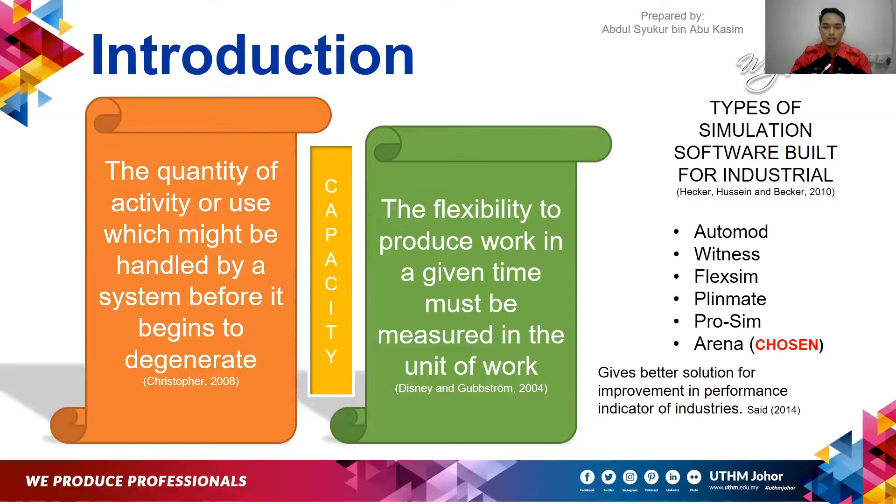There are many types of simulation software built for industry such as Automod, Witness, FlexSim, ProModel, ProSim, and also Arena simulation software. But for this study, the Arena simulation software has been chosen because it gives better solution for improvement in performance indicator of industries.

For the problem statement, small and medium enterprises contribute significantly to the country's growth. The food industry must enhance its production system performance and capacity utilization to increase production output. The daily output rate for Fast Kitchen Sdn Bhd Parit Raja is inconsistent and hard to achieve their target. The lack of standard production rate as the main indicator in the management may lead to the problem.

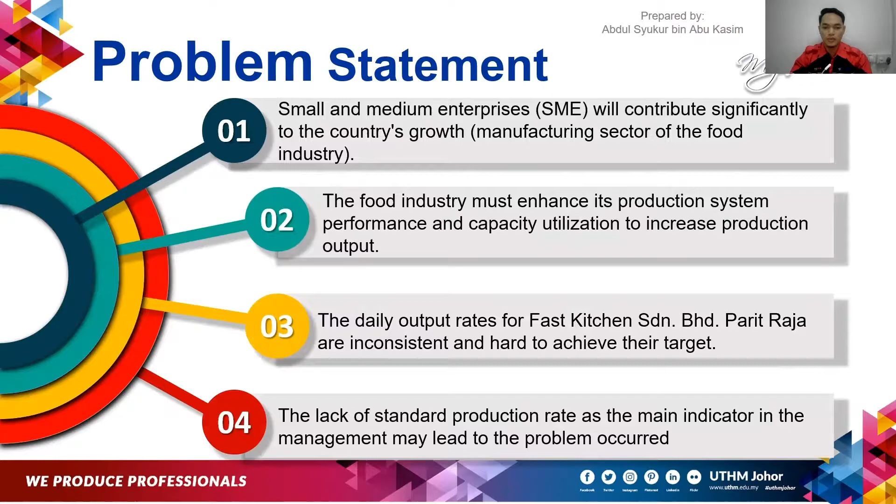There are two objectives in this study, which is to build and simulate the Arena simulation model for the production process of a food processing company. The second one is to analyze the capacity of the food production process using Arena simulation software.

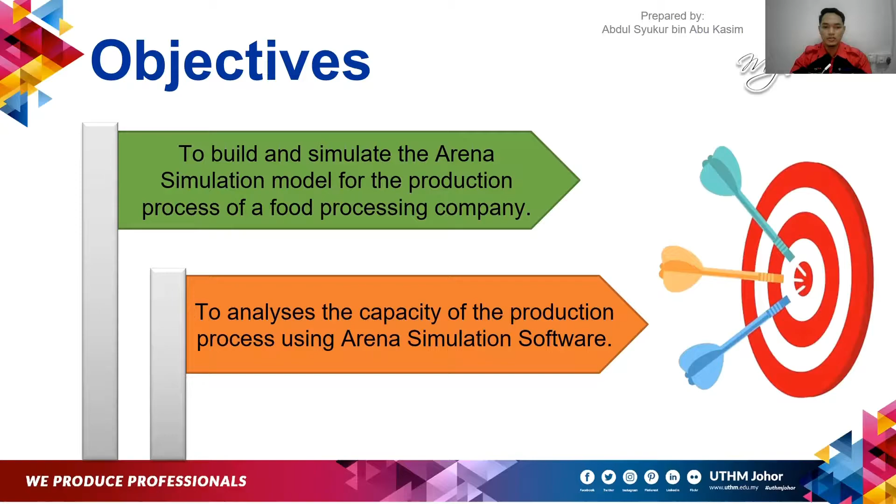In order to achieve the objective of this study, the scope of the study was the production process based in a small food processing company in Parit Raja, Fast Kitchen Sdn Bhd. The operation of the process is simulated using Arena simulation software, and the last one is the project study covered capacity production such as the company layout, manpower, time taken, and also production output.

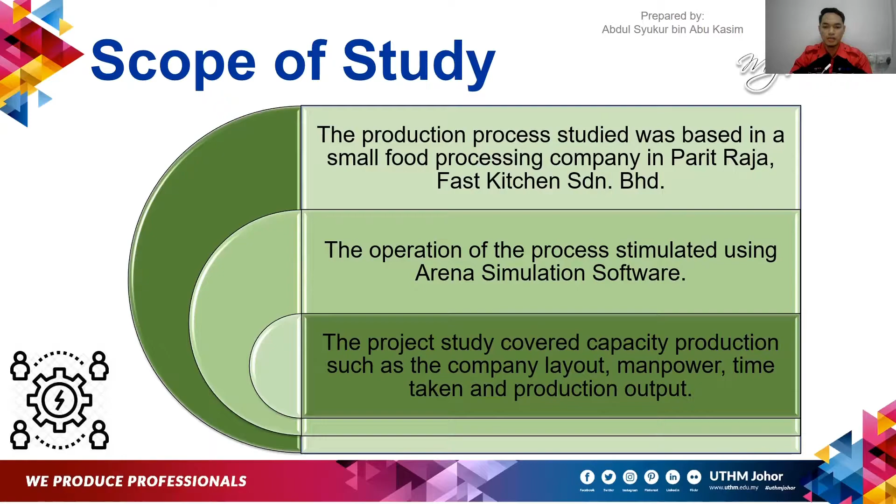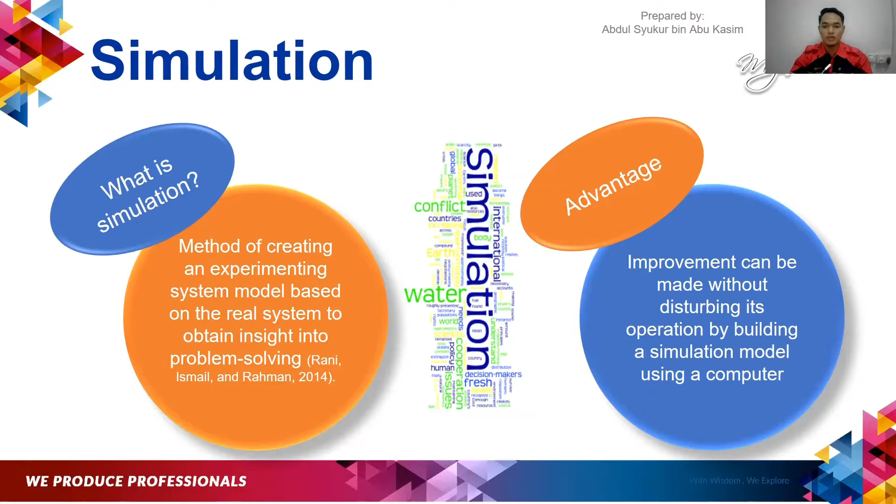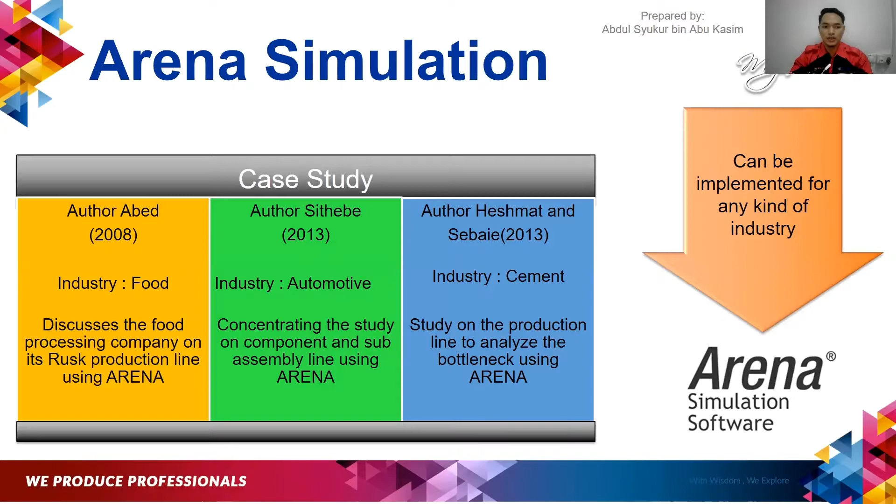What is simulation? Simulation is a method of creating and experimenting with a system model based on the real system to obtain insight into problem solving. The advantage of the simulation software is improvements can be made without disturbing its operation by building a simulation model using a computer. Arena simulation can be implemented for any kind of industry. As you can see here, there are many types of industries such as food industries, automotive industries, and cement industries.

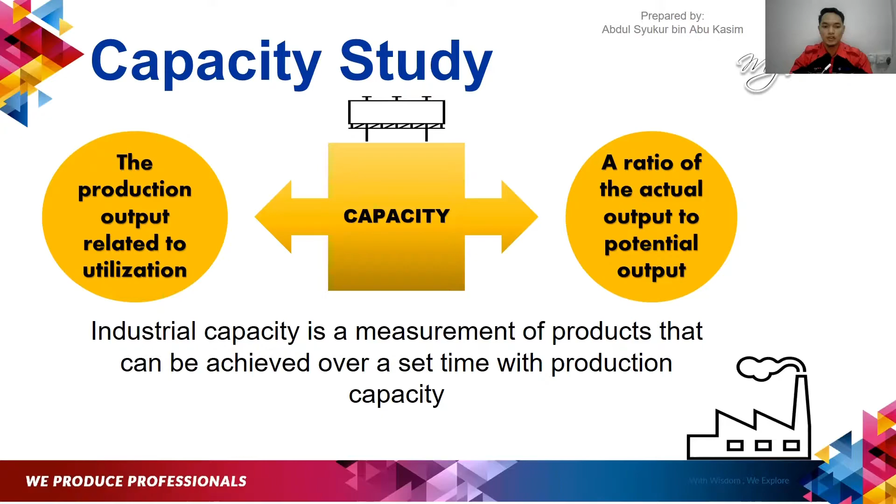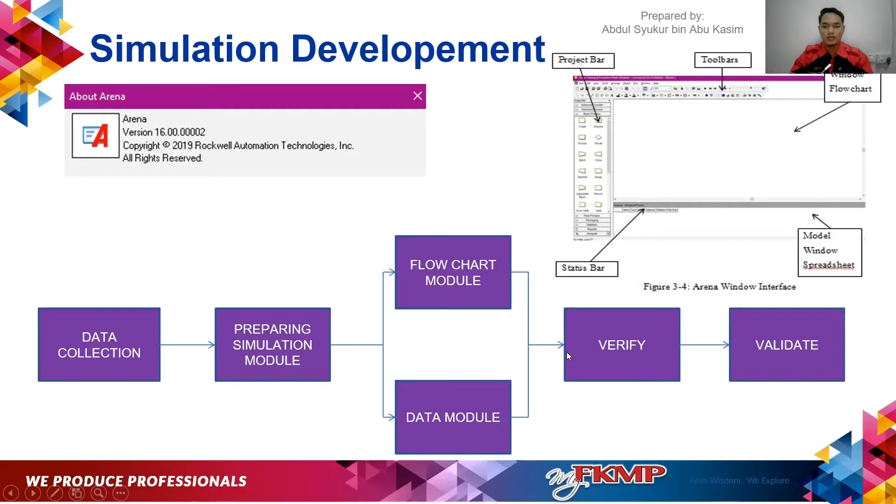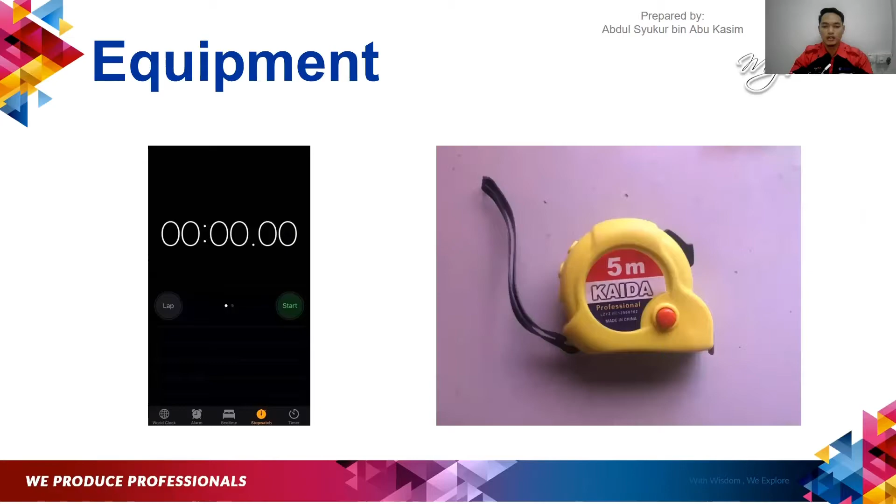For the simulation development, the simulation used is Arena simulation software by Rockwell Automation Technologies, student version. As you can see here, the simulation development starts from the data collection, then preparing the simulation module. There are two types of module that have been prepared, which are the flowchart module and data module. Both modules will be entered into the Arena window interface. After that, the result will be verified and then the data validated. There are two pieces of equipment used to collect the data, the digital stopwatch and the measuring tape.

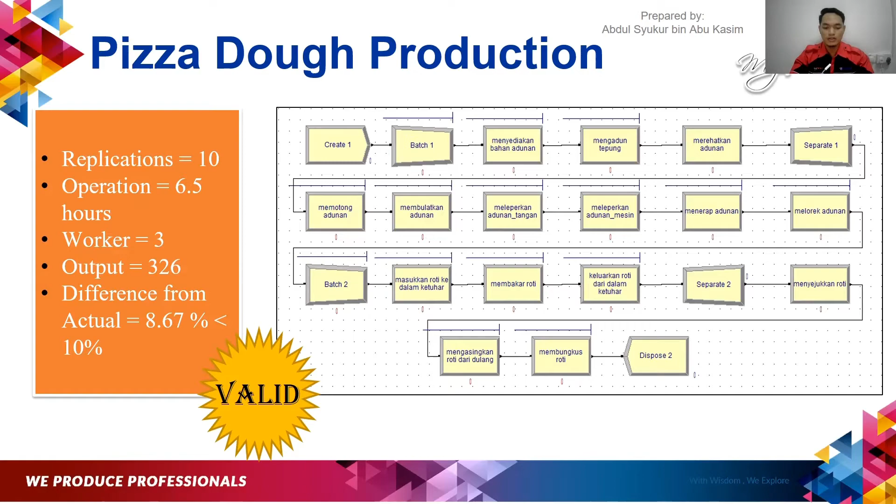For chapter 4, result and discussion. There are two types of model developed in this study, which are pizza dough production and pizza topping production. As you can see here, this is the flowchart module for pizza dough production in the Arena simulation software. The Arena simulation software has been run for 10 replications with 6.5 hours per day and 3 workers. The result of the simulation is 326 output, and the difference from the actual is 8.67%. Thus, the production model for this model is valid.

The second one is pizza topping production. As you can see here, this is the pizza topping production in Arena simulation software that has been developed. The simulation has been run for 10 replications with 5.75 hours per day and 3 workers. The capacity output result is 313 units. The difference from the actual is 4.33%, which is below 10%. So the production model is valid.

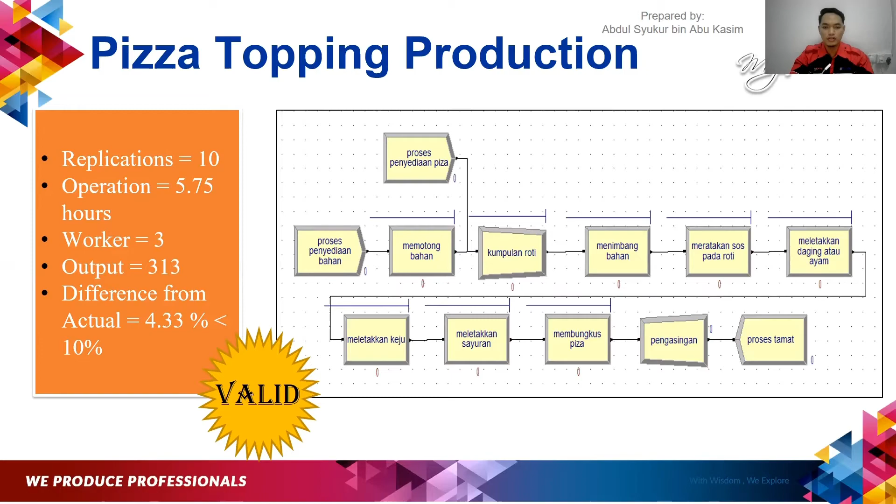As you can see here, there are 3 sets of simulation model. The first set is the actual from the production line. The second set improves the working hours, and set 3 adds 1 new worker in the production line. For the pizza dough production, the result is there is a problem of underutilization for both machines, which are mesin ketuhar and mesin pengadun. The utilization for all workers is still at a high value.

For the second set, the capacity output increased from 326 units to 396 units. The resource usage is still the same. The difference between set 1 and set 2 is too small. For set 3, capacity output increased from 326 units to 377 units. The resource utilization increased. There is more productivity in their process.

For the second production, which is pizza topping production, there is no problem with utilization. It is impossible to handle the increasing material flow; otherwise, a bottleneck will occur in the production line. For the second set improvement, capacity output increased from 313 units to 367 units. Resource utilization has improved. Working hours are affecting the productivity of the production line. The capacity output for set 3 increased from 313 units to 329 units, but the utilization of the production decreased.

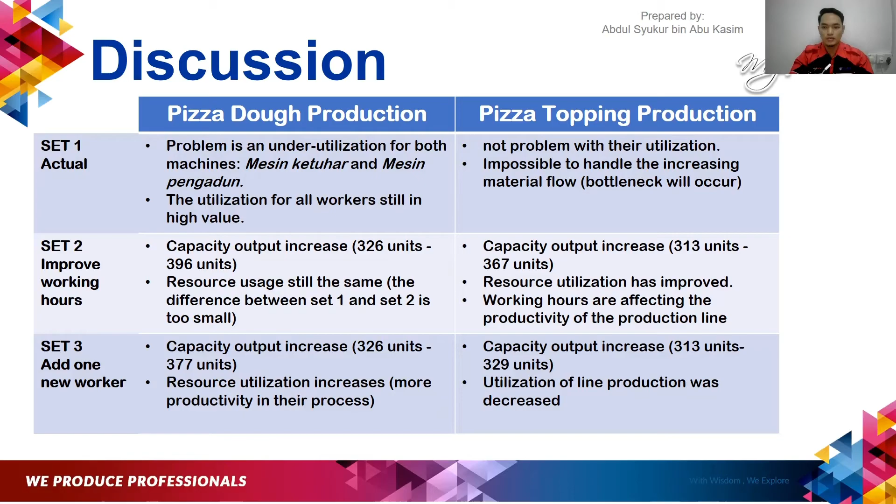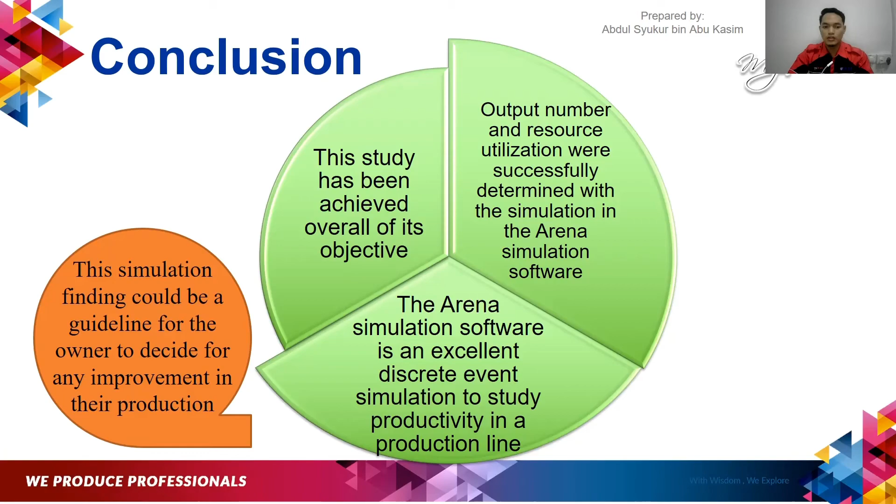As for conclusion and recommendation, this study has achieved its overall objectives. Output number and resource utilization were successfully determined with the simulation in Arena simulation software. The Arena simulation software is an excellent discrete event simulation to study productivity in a production line. This simulation finding could be a guideline for the owner to decide on any improvement in their production.

As for recommendation, future studies should understand the production line clearly from the beginning until the end of the process. Next, the data collection on worker performance should be carried out when the production line is highly productive. The last one is that future study must include the queue time while analyzing the simulation model.